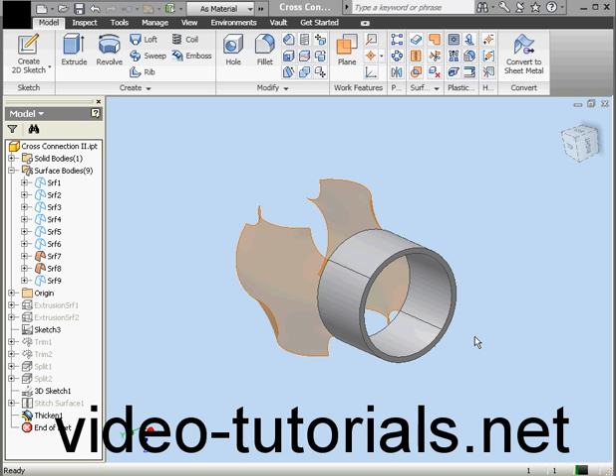Welcome to our third tutorial about creating a cross connection.

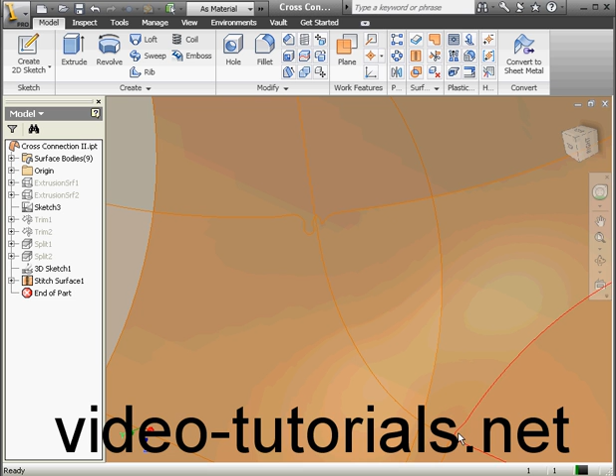Let's start by hiding some of our features. Right-click and unselect visibility, right-click and unselect visibility. Let's collapse surface bodies and delete thicken 1. After we stitch the surfaces together, if we take a closer look at the connection between the adjacent faces, we can see that we've obviously got some problems. If I try to create a solid right now, I'm most likely going to get an error message.

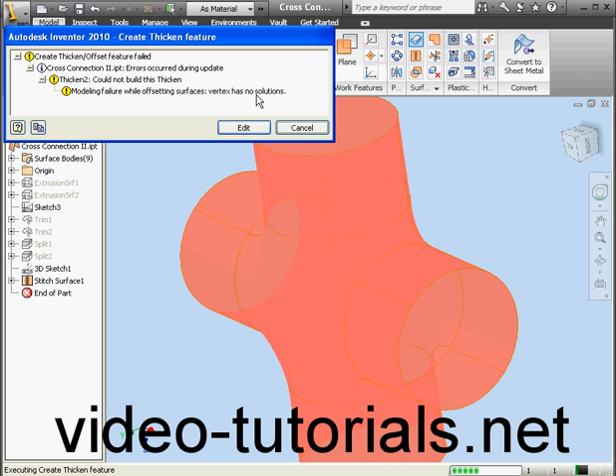Let's check it out. We'll activate the Thicken Offset tool. Quilt, and OK. Modeling failure while offsetting surfaces - the vertex has no solutions. Let's cancel out of this warning message.

The reason for this error is that we created the boundary patches using sketch curves. As a result, we don't have tangent relations between adjacent surfaces. We're going to have to fix this. In this chapter, I'm going to show you how to solve this problem.

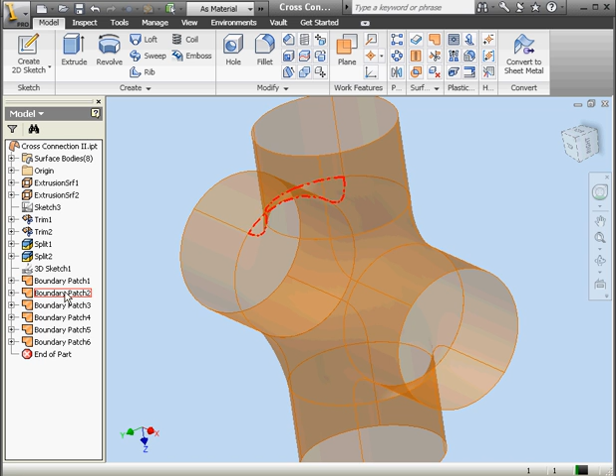Okay, let's start by getting rid of this last stitch feature. Right-click, delete, OK. Let's select all of these surfaces, boundary patches 1 through 6, and delete them as well.

Now let's double-click on our 3D sketch. We're going to select and delete these lines. And we're ready to finish the sketch.

If I simply try to create boundary patches, I won't be able to select the correct edges now. As you see, when I mouse over, the entire circle becomes highlighted. There's a neat trick you can use to solve this problem: we're going to use an offset surface with a 0 distance.

Select this circle. We'll set the distance to 0. Basically, what this does is create a second surface in the same place where the original surface is. Let's click OK.

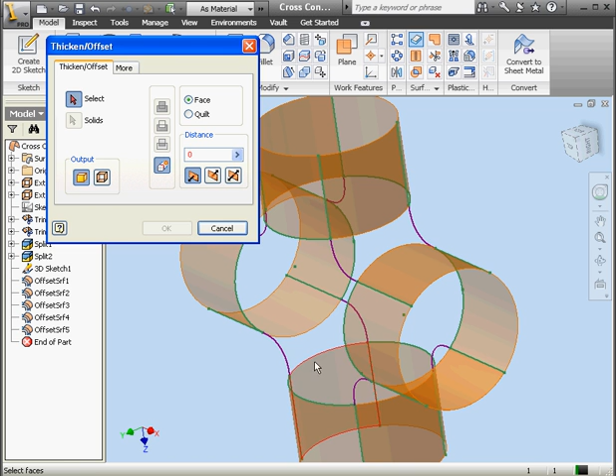And we'll do the same thing again. OK. And again. And a few more of the 0 offsets. This one, OK, this one. Surface output, OK. And the last one here, surface, OK.

Now I'm going to hide extrusions 1 and 2. Right-click, visibility, right-click, visibility. Let's apply some boundary patches again. Here's the boundary patch dialog window. We'll select our edges now, this edge, and another curve.

At edges 1 and 2, let's apply a tangent condition, and click Apply. Done. Now let's make the sketch visible.

Activate the Boundary Patch tool again. I'll select this edge, this curve, another edge, and this curve. Apply a tangent condition to edges 1 and 2.

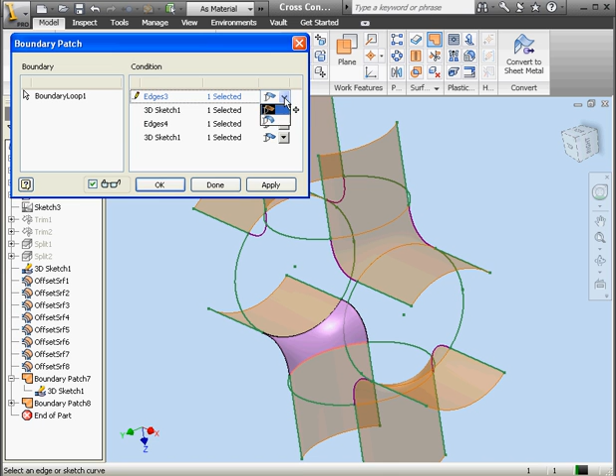Apply. Now let's get this edge and this curve. Here's another edge, another curve. Apply tangent conditions to edges 3 and 4. Apply.

OK, tangent conditions to edges 5 and 6. Apply. Let's bring back extrusions 1 and 2 now. Right-click, visibility, right-click, visibility. We're going to offset the remaining segments now.

Surface, OK. Thicken offset, choose this surface. Surface, OK. OK. OK, again. OK, two more to go.

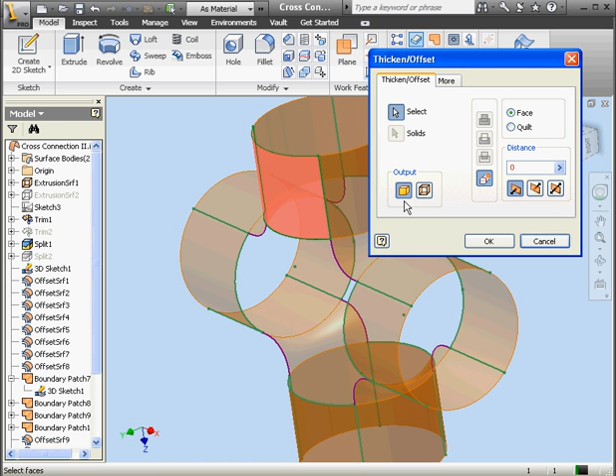Now let's hide extrusions 1 and 2. Right-click, visibility, right-click, visibility. Oh, I see here that I missed a segment. Right-click, visible, OK, and let's hide it again. There we go, surface, OK. And let's hide it again. Let's also hide the 3D sketch.

Now we're ready to apply the boundary patch. This edge, this edge, this edge, this edge, this edge, and this edge, and this edge too. We're going to apply a tangent condition. Last one. Apply.

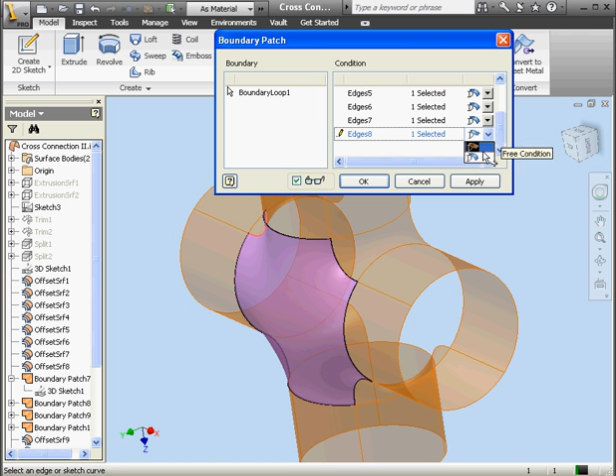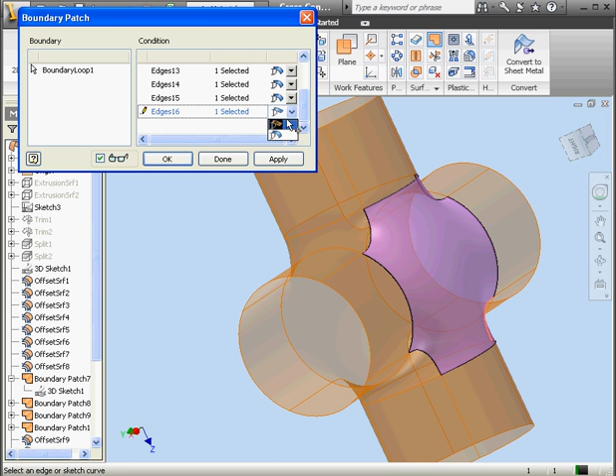Okay, and let's do the same thing on the other side. Let's select our edges. Let's apply a tangent condition as well. Apply, and we're done. Now let's shift select all the surfaces.

We'll do it in the browser, and then activate the stitch command. 22 surfaces are selected. Let's click Apply, and done.

Let's zoom in a little bit to look at the connection between the surfaces. As you can see, it looks much better. We're ready to create a solid.

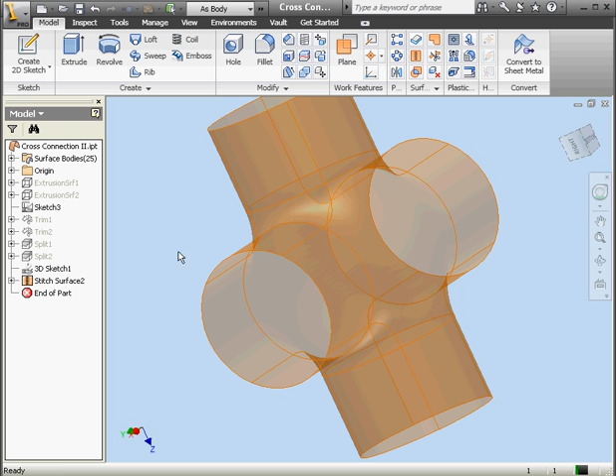Let's activate the Thicken Offset tool. Select Quilt this time. Let's make the distance 1/8 of an inch, 0.125, and click OK. And we've successfully created a solid.

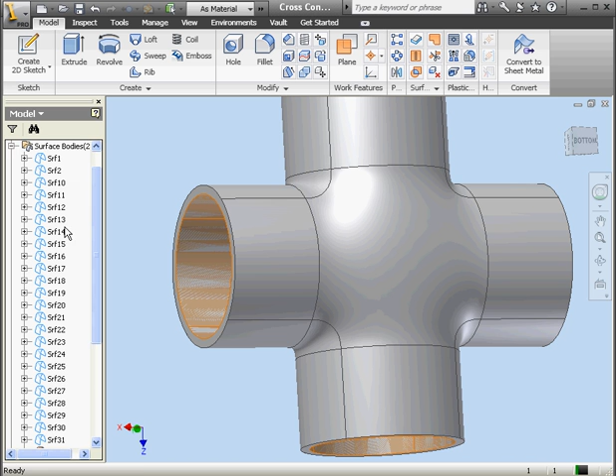Let's hide our surface body. Right-click, Visible.

Okay, let's see how we can build this feature a different way. Let's undo, undo it again, and undo it a third time. I'm going to see how we can get the same results for this cross connection using the shell command.

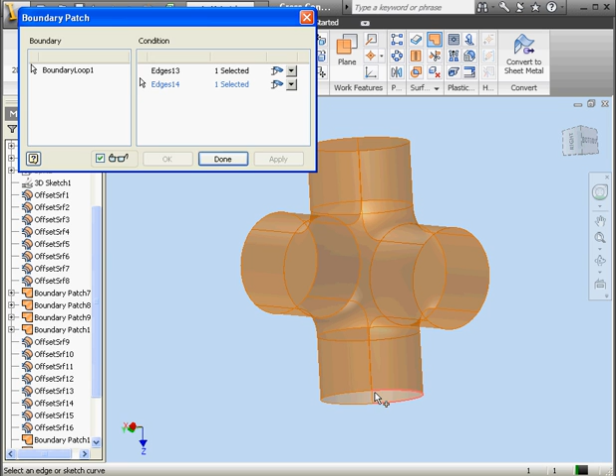Let's select these 4 edges. Click Apply. Same thing over here. Apply. Apply, and last one. Apply, and done. Now let's shift select all the surfaces in the browser.

Activate the Stitch tool. 26 surfaces selected. Let's leave Maintain as Surface unchecked, and we'll click Apply. As a result, we'll have a solid. Click Done. Right here we can see one solid body in the browser.

Okay, now let's use the shell command. Remove faces - we'll select this one, and we'll mouse over and select this one. Another one here. Thickness, let's make it 1/8 of an inch. And click OK.

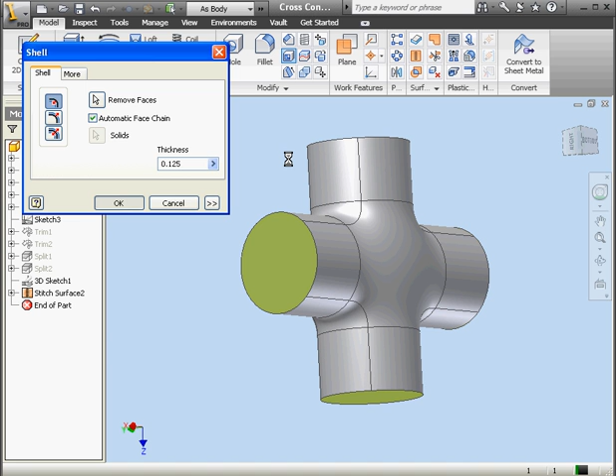And as you see, we have the same results.

I want to show you one final thing in this chapter. Let's go to the Tools tab. Click on Application Options. When we've got the pointer over more than one object, after a 1-second delay, the Select Other tool appears. The Locate Tolerance option sets the tolerance option in pixels.

It can be anywhere from 1 to 10. Here you can set the delay in seconds before the Select Other tool appears. You're also able to turn it off.

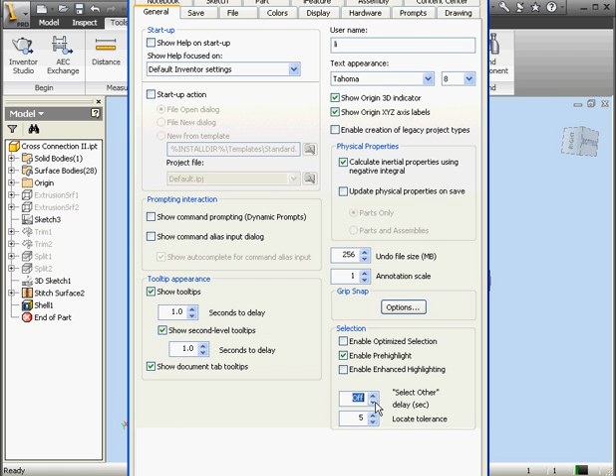Let's cancel out of this window for now. And let's see how the Select Other tool works. Basically, what you do is scroll through the selections by clicking on the green arrows. You can go forward and back, and when you're ready to select, you click on the little green button in the middle.

And this concludes our third tutorial about creating a cross connection.